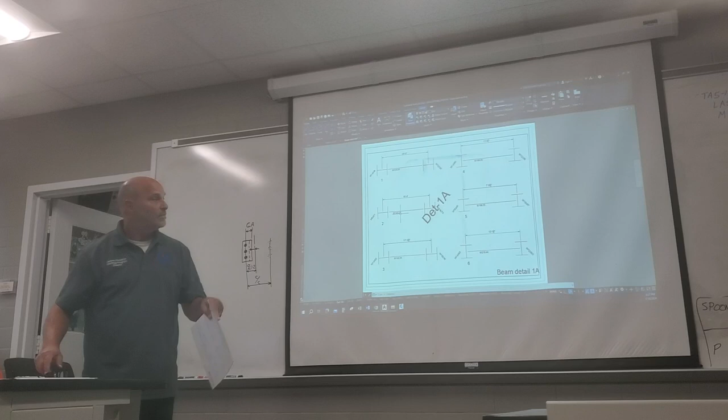Because I've shown you both ends of that beam. So on the previous assignment, we were just focused in on one end. All we could see and were worried about was that one beam and that one column right there. Now I'm showing you both ends.

So this is what would be handed out as a drafter. This is what we would receive. It's already gone from the design stage, where the facility says this is what we want. We want this kind of a unit. So different companies came in, they started engineering all the piping, all the other vessels and everything that needed to be out there and on there. And they said, all right, civil structural people, we want all this off the ground. How can we make that work?

So then the civil structural designers went through and they said, well, we've got this span right here. We need to support this. We'll put a column there. We'll put a pipe rack. We've got all this pipe that's coming from this location all the way over to here. We need to run all that pipe over there. Let's do a pipe rack because it's not just right there. Sometimes it's let's do a T-support, kind of like what we see outside these doors.

Does anybody take Highway 69 to Nederland, like by the airport? That facility that's going up in between Twin City Highway and 69, they're still in the civil structural phase of that. Most of the areas are. When you ride by there and you see all those square pillars, those aren't 4x4s. A lot of those, I'd say they're probably 16, 18-inch squares at a minimum. Those are the pilings they're pushing down into there to get that compression, get that strength up under whatever's going to be out there. Sometimes it's vessels, but it's the civil structural that does that.

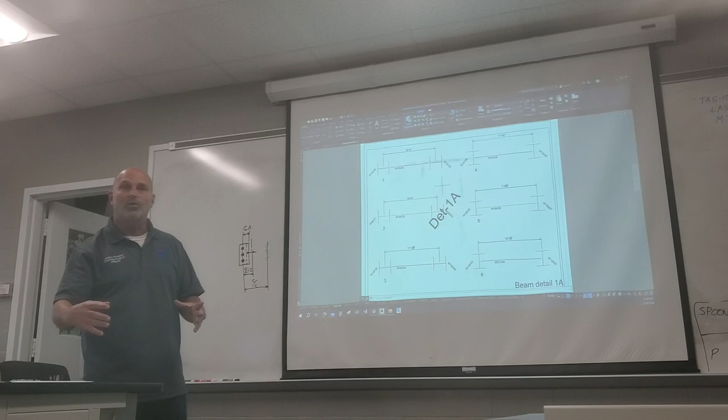So right now, they're mainly focusing on the below ground stuff. I don't go by there that much. Every few weeks or so, I'll ride by there and notice a few changes. But I was going by there fairly frequently during the long semester, and I was noticing pretty regularly they were out there pushing those pilings down. I've seen them do stuff like that out there at DD6. But that's all still civil structural.

Remember, civil structural starts at the top of the concrete and goes down. Anything steel above that concrete is still civil structural. All the rebar, all the footings underneath, that's all civil structural. All the beams, columns that you're going to see start going up pretty soon. Once they start getting all those things built, whatever's going to be sitting on those areas with all those little squares, it'll look like somebody took a handful of square toothpicks and threw them in the ground. Those are going to have something up there. They're supporting something. At some point, they're going to start pouring slabs out there.

As they pour slabs, you're going to start seeing something similar to those footings, similar to what you see out in parking lots with light poles, those concrete piers that stick up. If you're riding by and you see some of those sticking up close enough to the highway, don't get in a wreck. Go take the feeder and stop over there. Don't pick up any hitchhikers in that area, remember?

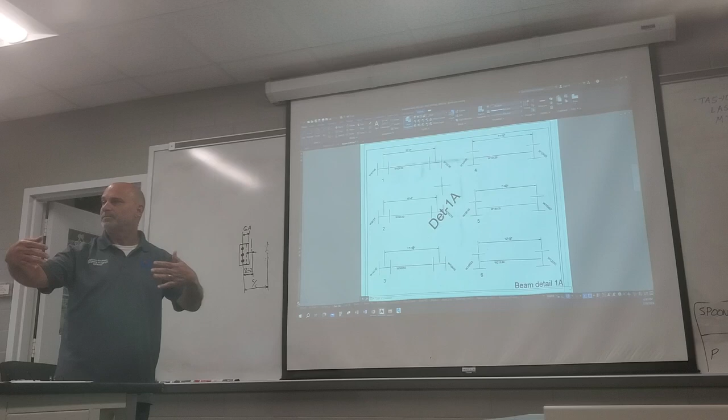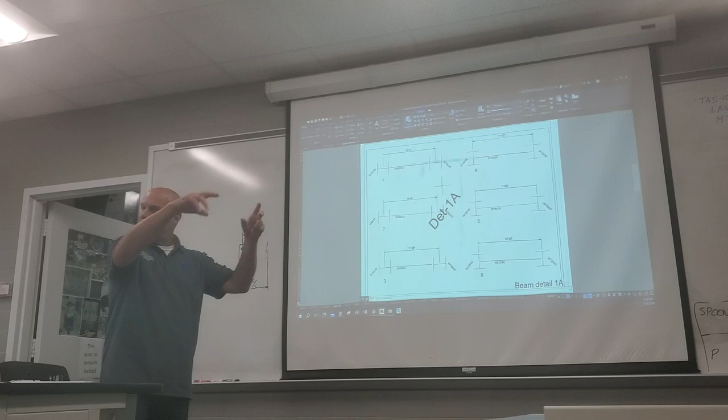You're going to see anchor bolts sticking up out of a bunch of those. In the future, you might see a bunch of those little piers sticking up out of the ground with the anchor bolts sticking up, usually 4. And then the next thing you're going to see is all these columns set on there. Then you see the beams starting to hang between them, the bracing starting to go between them. That's all the structural part once it gets up into that. So that's what it is.

Remember, this has to be 100% accurate before it gets out there. Not that place over there. They can probably drop it down on the ground and make changes because there's nothing going on out there yet. There's no actual facility, no unit, no processing being done out there, so there's no flammable gases. I imagine they have the freedom of doing stuff like that. But on your normal basis as a structural drafter, you're working off this erection drawing saying that we're going to build this. I need to tell them what they need to do to build that.

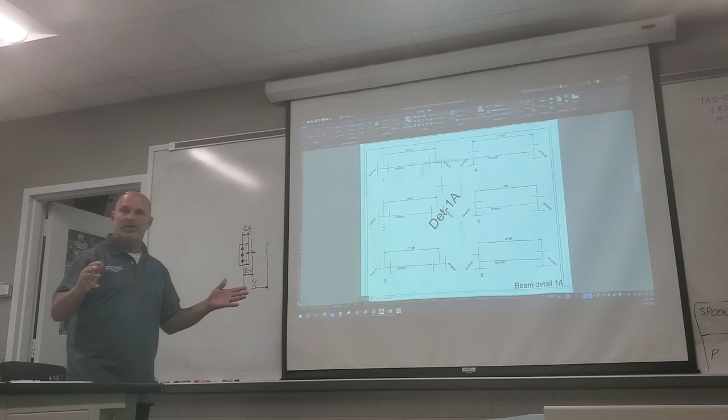We need a column this size, this tall, with holes at this location. An anchor bolt to the bottom with these holes, anchor plate at the bottom, base plate at the bottom, with holes in this pattern to match what's going to be out there when we pour the concrete. And then we're going to have this beam up here that needs to be this long with angles on each end, held back 1/4 of an inch, and it's going to drop down in there, and those holes are going to match. And they're going to move on to the next one, into the next one, into the next one.

So we as a drafter look at it and say, well, what's happening? On this one right here, as we talked about before, we've got a center of column to center of column dimension, 20-foot 0. We say, well, let's focus on this end, just like we did on that last assignment. We say on this end, we've got a beam that's attaching to the column flange. Our beam is a W12 by 26. Our column is a W14 by 48.

But what else can we pull from that picture? Well, we know that this end is going to have about -7 inches. We know that our angle gauges in here, our center to center is going to be either 3.5 or 5.5. We know that possibly by now, after doing that first assignment, you've seen that the W12s are on the 3 rows. So you're going to start to learn stuff like that. I can tell you how to judge it, but right now, look it up on the chart.

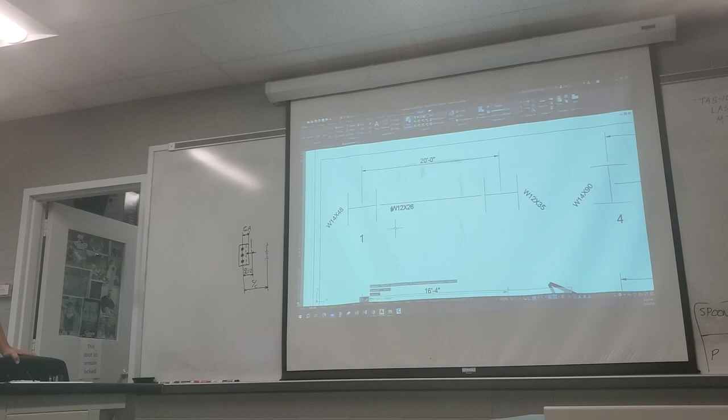On this other end over here, we're attaching to a flange over here. So our minus dimension on this end, our column is a W12, is going to be about -6 inches. So this as a drafter would be what we would be working off of to detail that member right there. To take that piece right there and say, here's how long it needs to be. Put the angles on this end. Here's how many rows. So that is what you're going to be doing on this one, is filling in that last sheet. I need to go get some copies of that too.

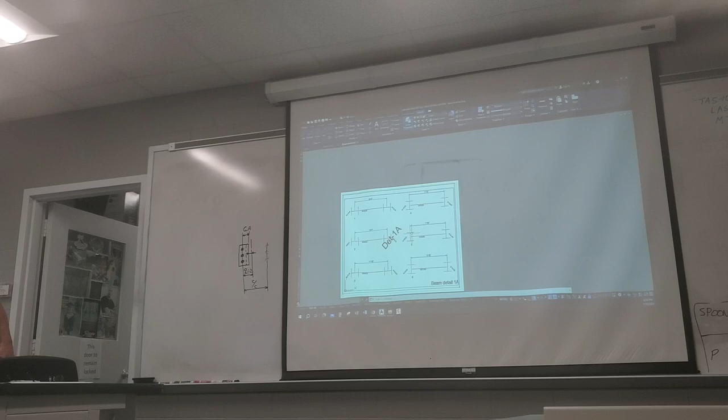So on your first sheet, on the left-hand side, you've got 3 beams attaching the column flanges on each end. On the right-hand side, numbers 4 through 6, you've got 3 beam details that you're doing. Those are attaching to column webs on each end. So on these first 3, about -7 for this one, -6 for this one, -4 over here, -7 over there, -7, -8. We can guesstimate on that.

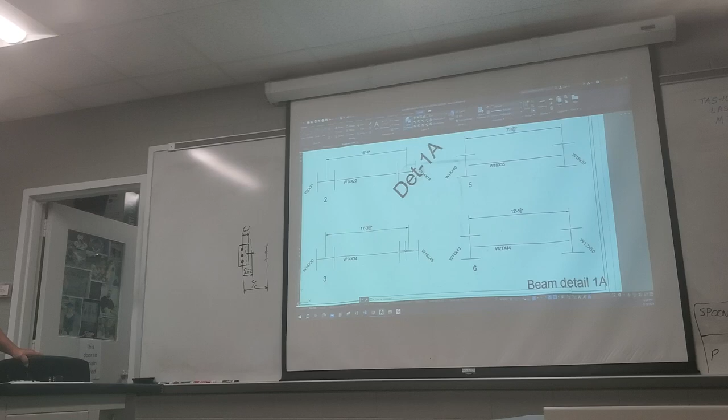And right now, like I said, it's a matter of just you looking at it saying, before I even let somebody else check it, I want to make sure that I'm at least kind of going, or maybe you're just jetting out of here and not even thinking about it till Saturday. All right, here's a quick check for it. If I look back at this piece right here, number 3, and on this end over here, I see -1/4 inch, 1/8 of an inch, 3/16 of an inch. I know something's wrong because that was attaching to the flange. It's going to be about -7. About -8 on that right end.

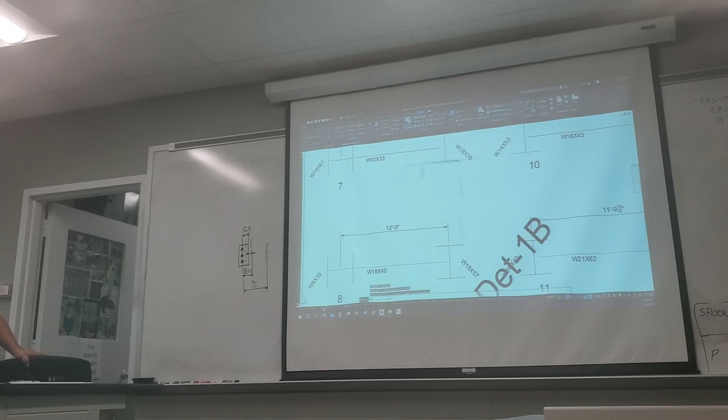Over here on these, we know that our minus dimension for all of these is going to be in the 1/8 to 3/16, 5/16 possible. I don't think we'll get that heavy though. But it's going to be right around 1/8 to 3/16 as a norm. The second page that I gave you, beam detail 1B. On this one, end to end, you've got a column flange on one end, a column web on the other end.

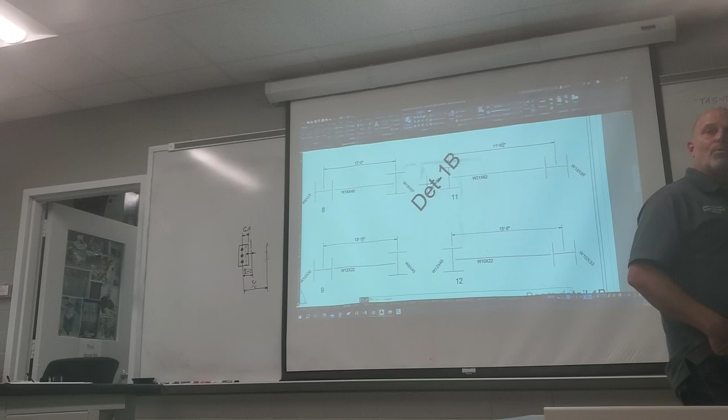Once again, when we're calculating those ends though, we're calculating just based on that end. Then we will look at the other one. What happens on that left end over there has nothing to do with what happens on this right hand end. We're going to calculate those 5 items just like we did on that first assignment for one end, and we're going to push that out of our head. You'll learn to carry some stuff forward. But for right now, you calculate one end, you push it out.

Then you look at the other end and say, okay, I've got a beam that is this size attaching to a column of this size. A column web or a column flange. You've only got 2 choices there. So on this one, it's opposite on each end. So on one end, it's going to be minus about half of what that size is. This one's going to be about -9 because we're attaching to the flange of the W18. This one's going to be about -5 because we're attaching to the flange of the W10. This end over here, all we know is it's going to be about in the 1/8 to whatever range.

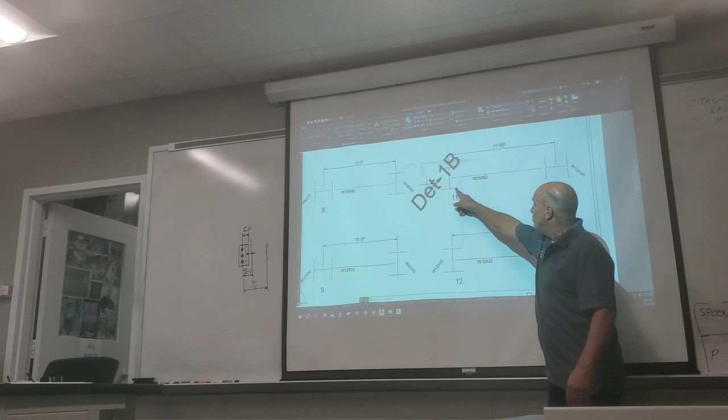Over here, 1/8 to whatever range. Over here, 1/8 to whatever, 1/8 to whatever. Over here, about -5, about -4. So what you're doing is, and like I said, I'm gonna go get some more copies of that third sheet here in a minute. I forgot I need to print some more of those out.

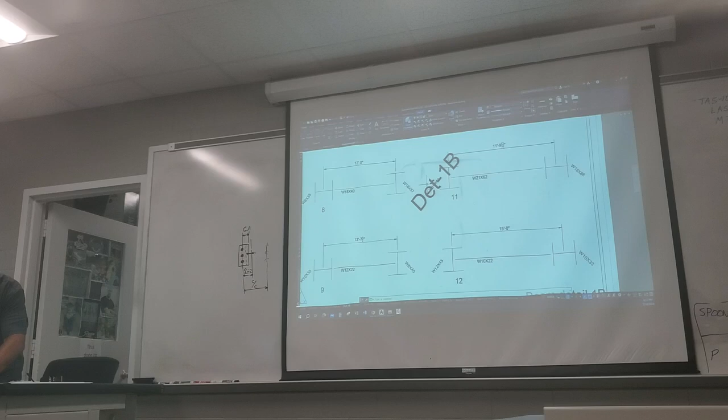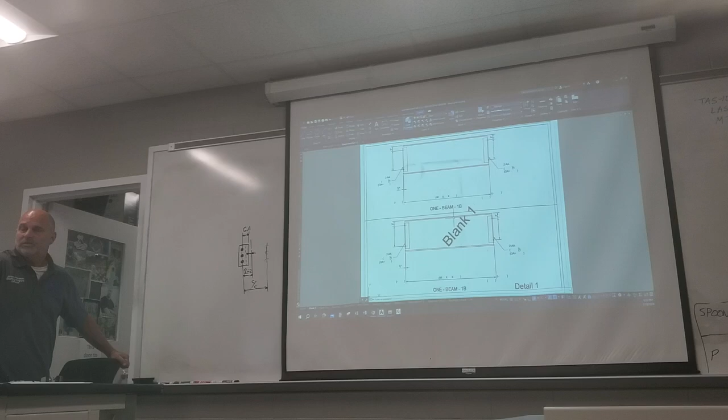So what you've got here is a total of 12 pictures between those first 2 handout pages. So you're gonna need 6 of these sheets as a minimum. So all I have in your packet right there is gonna be the one. So I will go get some more of these in a minute. But once again, you're gonna be filling out each end, just like you did before. The number of rows. The only thing that you don't have is a measurement on this one. I just wanna make sure y'all remember where that came from.

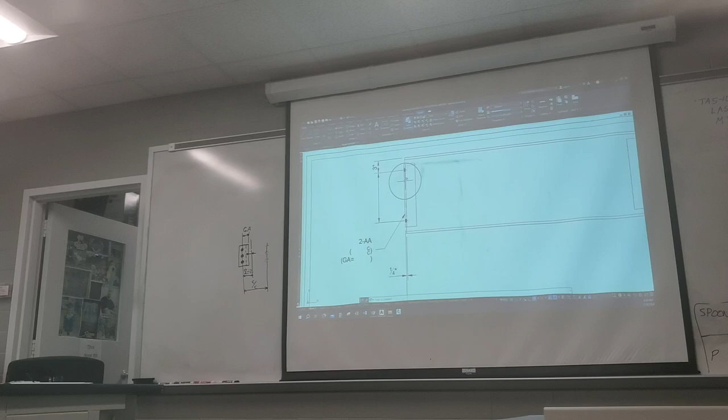So you've got your distance between rows. So if your beam has 2 rows, you're just gonna write 3 inches right there. If your beam has 3 rows, you're gonna say, well, there's 1, there's 2, let me draw a line, 3 inches right here for that measurement, 3 inches for that measurement. If yours has 5 rows, there's 1, there's 2, so you're gonna draw a line for number 3, line for number 4, line for number 5, you're gonna draw those lines out and get 3 inches between each one.

Mr. P, this one's a W6 and it's 6 1/8 deep, and this one's a W18 by 145, and it's really 18.5 inches deep, but the pictures are the same. It's a sketch. This is something that if you got a structural job, you can actually make you something like this or a picture like this that you can print out and just write your stuff on just to get you started on what you're doing. It doesn't matter how tall that piece is and how many rows you can physically put in between those 2 little lines that I drew. That number is coming off that chart.

So here's what's new. The new part, now that you're looking at it on its own page, its own detail. Right over here, don't worry about that 2-AA. We'll get to that later on. We're not adding that much new today. Just ignore that where it says that. Here's your center to center. Here's your gauge. You're gonna be filling those out. Your number of rows and your minus dimension, just like before. You're gonna be doing it on each end. The only difference on each end is that measurement right there. Then, this measurement right here. This parentheses on the bottom.

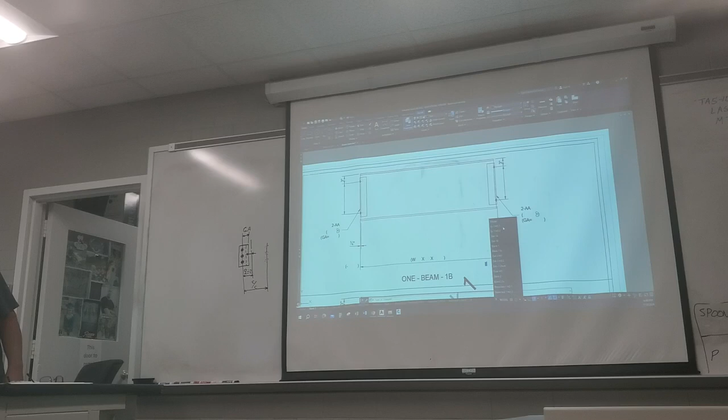If you look back at your sheet, the first sheet of this packet, like I said, I'm gonna print quite a few of those, so if y'all need extras, if you wanna use the one I gave you to make up some, use it as a note sheet, you're more than welcome to. I'll print more if I need to.

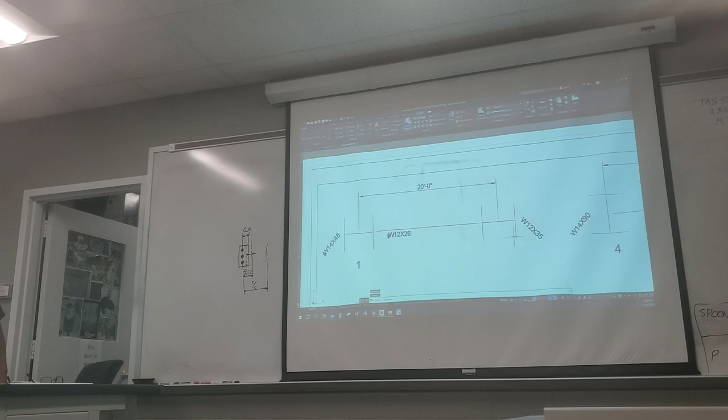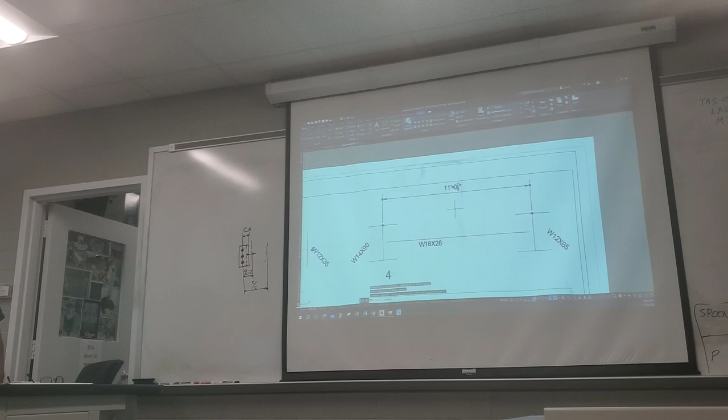So on number 1 right here, you've got a W12 by 26 beam attaching to a column flange on the left end of a W14 by 48, a column flange on the right hand end of a W12 by 35, and you've got a distance of 20 foot 0 center to center on the column. That is called your overall dimension. That's just what it's referred to. The measurement center to center of the column. It doesn't matter if your column is turned in that direction or if your column is turned in this direction, attaching to the web. It doesn't matter. Like I said, we always dimension to the centers of the columns.

So that 20 foot measurement right here on number 1. Here's your number for it right here. That 20 foot dimension is going to go in that area right there. That is your overall dimension. If the parentheses are too small, that's okay. Just write it underneath it or something. Don't stress over something like that. That is where your overall measurement goes. Your overall measurement being the center to center on your columns. Everybody got that?

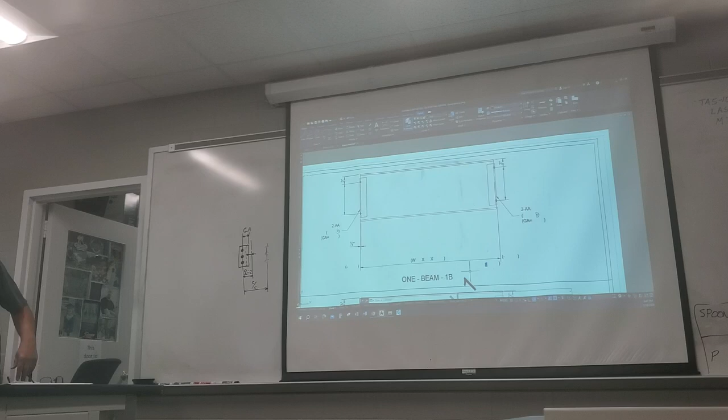On this dimension right here, you will see that that measurement from end to end represents that finished product when it leaves the fabrication shop, gets loaded onto a truck, driven out to some facility, some refinery, and brought in there, hooked onto with the crane and lifted up into position. So whether it's attaching to the flange or the web of that column, it doesn't matter. As long as we minus the right numbers, that thing should slide right down in between there.

So what we're gonna do is we're gonna take this measurement right here, our overall dimension. We're gonna subtract that number, and we're gonna subtract that number. Coincidence that that number has a minus in it? Subtraction in it, in the parentheses, called a minus dimension. So that's what we do. We take that overall, and we say this finished product that is gonna leave and just go perfectly into place. We subtracted on each end. There's how much we subtracted.

Could that number be a 0? Yes. Could that number be a plus? Yes, but we're not ready for that. We're tip of the iceberg. There's so many different variations in structural steel because we have to meet the needs of what's going up. There is no standard in the pipe department that says this is what we're gonna do. Just about every pipe spool that goes through those pipe departments is different.

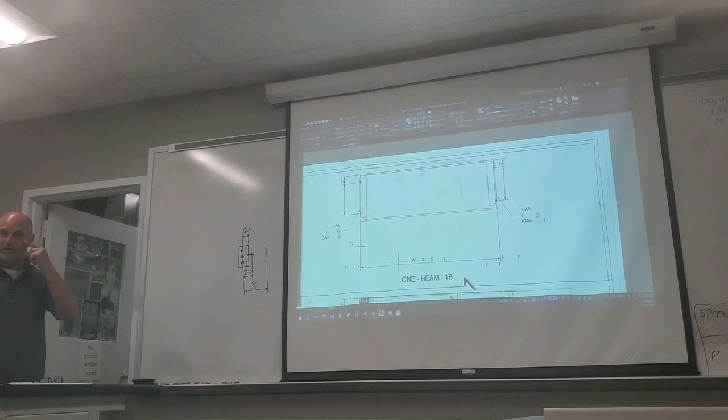I say, well, we're Exxon Mobil, why don't you build this facility for us? Sure, we'll build it for you. Another company says, hey, they got that nice new facility y'all built for them. Why don't you build it for us over here? Sure. Where you got room? What size area do you have for us? That's what's gonna dictate how everything is set up. So even though those two are built right across the road from each other, doing the exact same product, literally trucks pulling up and saying, which one of y'all needs a truck to? You know, who needs a truck? I'll turn left or right, it doesn't matter.

Doing the exact same product is gonna be a whole different layout because it's all based on where's the tank gonna be for this project, where's this vessel, this piece of equipment. Now we got a pipe between them. Now the structural people have to come back and say, okay, well, if this is what you're doing on this project, we need to support this run because it's 20 feet. Over on that last project, it went 6 feet this way and it turned 90 because it had to go this direction, not that way.

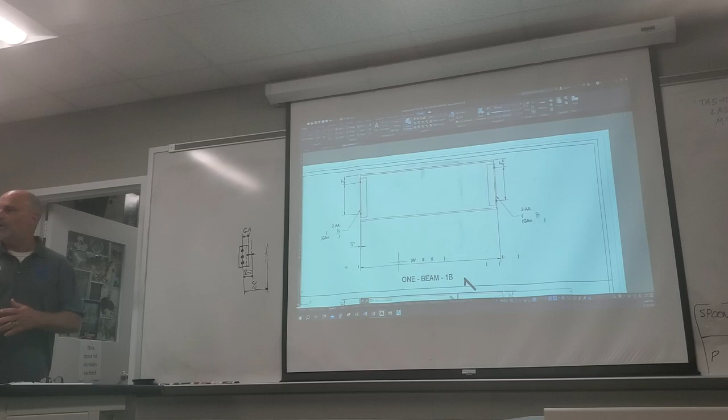So as a structural drafter, we have to look at each individual one. And then we have to look at each end of that one and say, what do I do here? What do I do here? And we're gonna write those minus dimensions down. Then we're gonna do the math equation. We're gonna say overall center dimension minus this equals, and we're gonna put that number right there where my cursor is, in front of those parentheses. That's referred to as a shipping length.

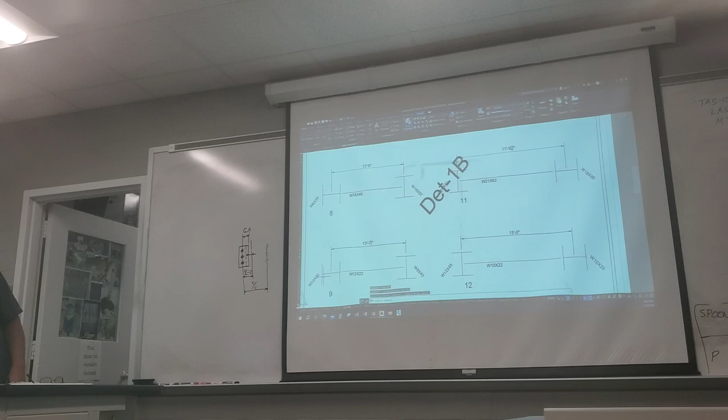So when we're putting all this stuff on a truck, we need to know how long of a trailer do we need. That's why it's kind of referred to, I think, as a shipping length. That's how big that unit is gonna be when it leaves to go to the next step, when it is fully fabricated. Inside the parentheses right here, W something. Remember, we're talking about the beam. So if I go back to that sheet, first sheet, our beam is a W12 by 26.

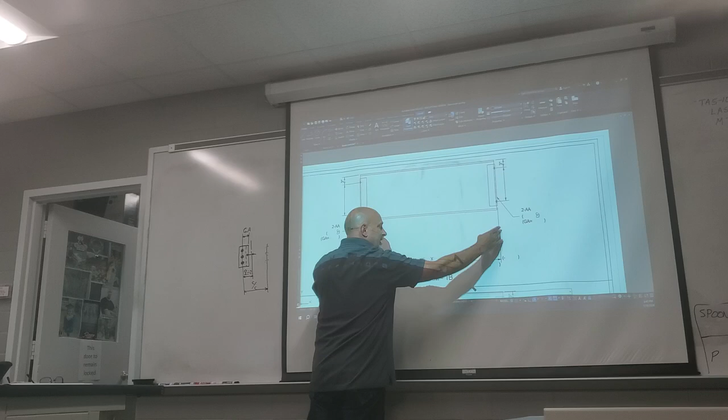So after we tell them the shipping length, the cut length, the end-to-end measurement for that piece once it leaves the fabrication shop, once we tell them this number right here, we're gonna tell them this piece is a W12 by 26 by, we have to tell them how long to cut that off. Because some point or another, those angles are probably gonna be made in normally just a whole different shop and warehouse type thing than what that W shape would be made in.

Those angles are gonna be made over here in your regular, pretty much standard around here fabrication shops. Most of them have one big area where they do nothing but those W shapes. The beams, the channels, stuff like that. They do the big heavy members. And then lots of times you have another facility, another shop over there that does nothing but plates. Maybe half of it does plates. Another half of it does angles.

So whenever that person goes to make this beam, he's gonna pull up this drawing that we as drafters, we as detailers create. And they're gonna say, all right, I'm making this one right here. Go get me a W12 by 26 and cut it this long. And then bring it down here. And if we had other things attaching to it, just like we saw out there, that handrail and stuff, maybe we've got plates on our beam. We're gonna detail this piece out. Right now, we're just talking about the ends of it.

So what dimension goes at the end? The shipping length or the actual? No, I'm gonna tell you. Okay. I'm gonna tell you in just a second how we find that. So we're gonna tell them, for the person over in this facility that's working on the W shapes, go get this size member and cut it this length. That length we know is gonna be held back 1/4 of an inch right here.

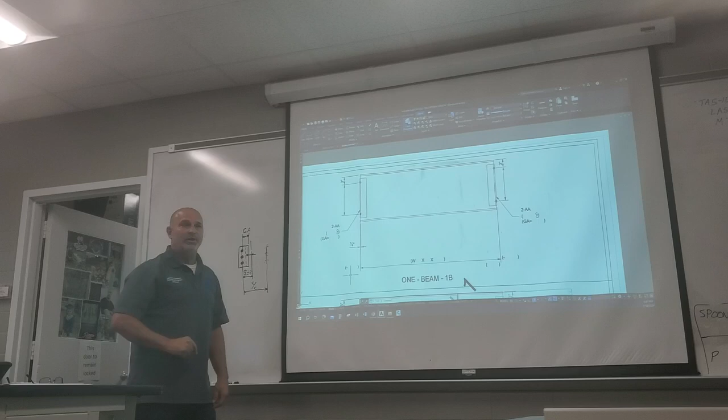So W12 by, so we started out, I'm gonna run through the formulas again. We had our overall minus our minus dimension, minus our minus dimension, gave us our shipping length right here, and then we're gonna tell them information about that W shape, W12 by 26 by. We've gotta tell them a length on that. So once I do this number right here, minus this, and I get this number right here, my shipping length, I can say, well, minus 1/4 on this end, minus 1/4 on this end, that's my length.

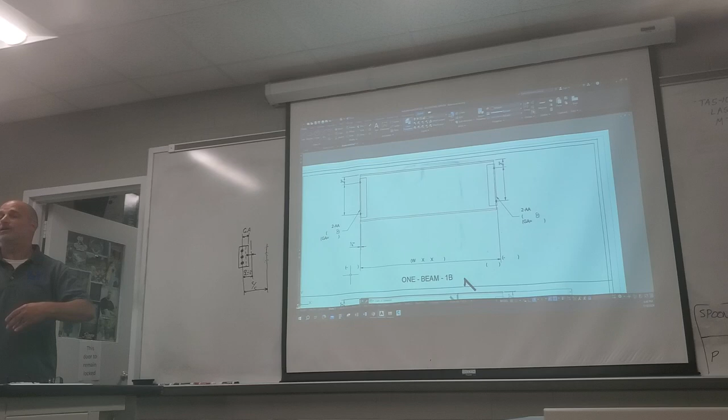So it's all formulas when you look at it. You don't have to be a math person, you don't have to like to do algebra or anything like that. But if you just write it down and say, oh, there's not a lot of A's and B's and X's and stuff like that, but that's a formula. Web thickness divided by 2, that's a formula. So don't be scared of the math. Don't be worried about the math in structural steel. It is what it is.

As drafters, at some point or another in all industries, it comes down to a measurement. Just because we do schematics in E&I, we say, here's a nice picture, at some point or another, somebody's gonna have to calculate that conduit, all that wire that's going through there, all the little fittings for that instrumentation stuff. So at some point, measurements are involved in all forms of drafting.

So we've got to tell that person how long to cut that member. And then once again, this is going to be done in one shop, those are probably going to be done in another shop. They're going to say, all right, on this end, we need 2 angles with this gauge, this center to center. On this end, we need 2 angles with this gauge, this center to center. And we need 1 beam this long.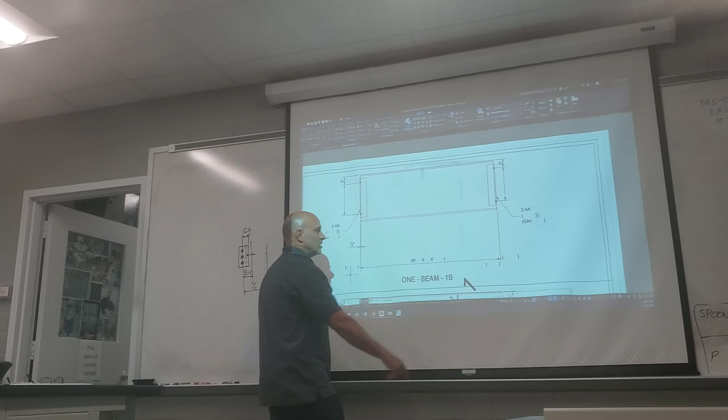Here's the twist. So this number minus our minus dimensions gave us our shipping length. That's the end to end of the angles and everything. Then we said that to make this, we already told them some info about the angles. For this, we need a W12 by 26 by our length. We don't show 1/16 of an inch measurements in this box right here. Everybody see that? That value right there, we do not show in 1/16 of an inch increments.

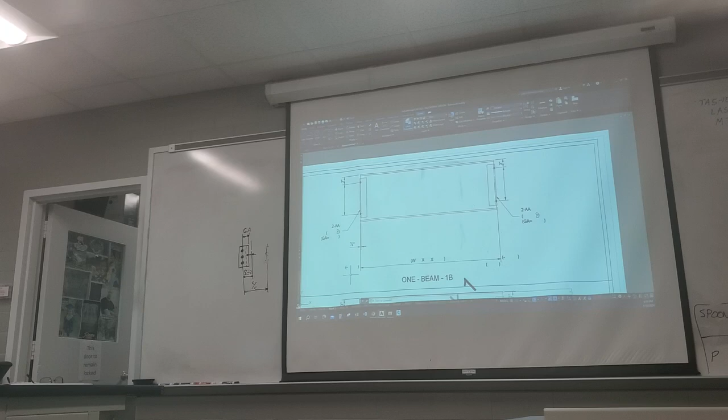How do we eliminate that? We don't show that dimension. That dimension could be 1/4 of an inch, it could be 5/16. It doesn't matter. When we go to write this length down here, we say that number minus those 2 numbers equals this, minus 1/4, minus 1/4. If it gives us an answer that's in 1/16 of an inch, we're just gonna drop a 1/16 off of it, because we're not gonna show that 5/16 anyway. It's just another rule. Lots of rules in drafting.

A lot of them can be answered just by looking at this stuff that I had up on the desk the other day. And Mr. P, why didn't you put it up on the desk? Well, I want y'all to understand that it's over there. If y'all want it, if y'all need it, go grab it. Bring it to your desk if you need to.

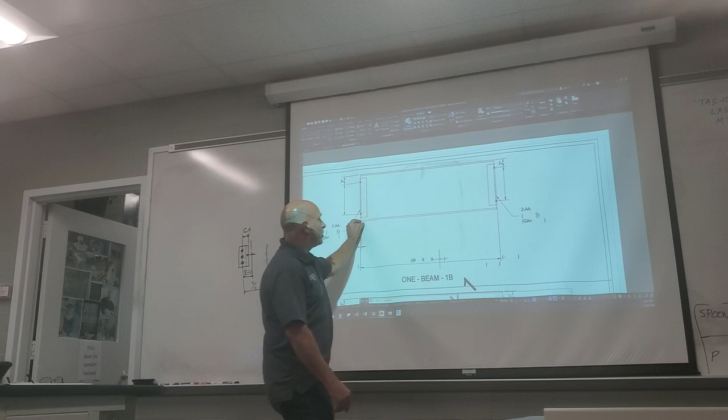So that one in the parentheses, you're subtracting a 1/4 inch from it? Which one? This one right here in the parentheses? Yes. We're subtracting really a 1/2 inch. A 1/4 here and a 1/4 here, yes. Every time? Yep. That's that extra cost of having to pay to have those 100% square cut. We're not gonna pay that. We're gonna do 10 beams for the cost of one, and we're gonna do it quicker than that machine's gonna square cut that one. Probably not quicker, but we're not spending the money on the machine.

So the shipping length minus a 1/2 inch. Yep. And then if it's in 16ths, knock another one off. Why? Not sure, just a rule. I don't know why. Knock the 16th off if it's in 16ths. So when I do the math, this one's okay being in 16ths, but when I subtract a 1/2 inch, so if I get a number right here, 10 foot 11 and 9/16, I'm not gonna tell them to cut that member minus 1/4, minus 1/4, 10 foot 11 and 1/16. I'm gonna tell them 10 foot 11. I'm gonna knock a 16th off. It's just a rule.

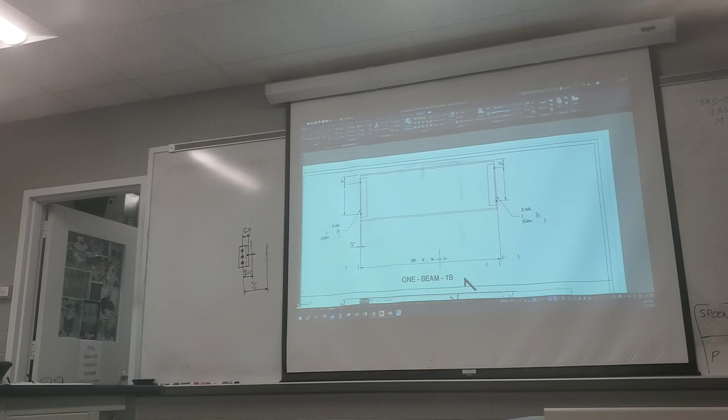So that's the only step that you're doing differently. You're carrying that value from that other sheet over to here, your overall dimension from end to end. And then you're doing the math, you're saying this minus those, and you're writing that value right here. And then you're looking at that other sheet saying what size is it? You're writing that right there.

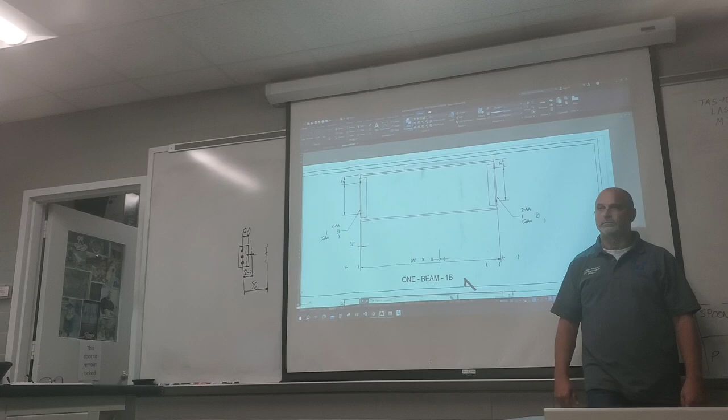So, I got a question, you kinda confused me there. So, say it was 11, or whatever you said, and 9/16. So you're knocking it back down to... I took the half off because of the quarter and quarter on each end, okay, which left me 11 foot something and 1/16. Oh, okay. I was thinking the other way around.

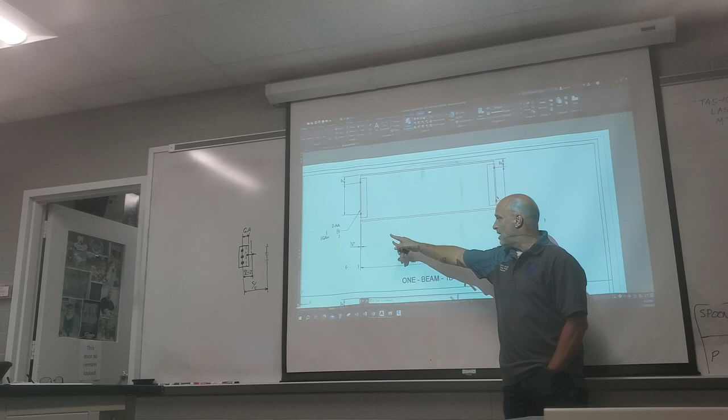From here to here, we're taking this number minus a quarter to get this value. And that is the only rule really for that: if it's in a 16th, knock another one off. If your answer right there is something in 13/16, you're gonna put something in 3/4. You'll knock a 16th off. Okay, yeah, that's what I was getting at.

Cause I thought you went from 9/16 all the way down because of that rule. No, I went because of the minus quarter. Okay. Yeah, no, it wasn't just automatically knocking it off to an even inch. Okay. Yeah.

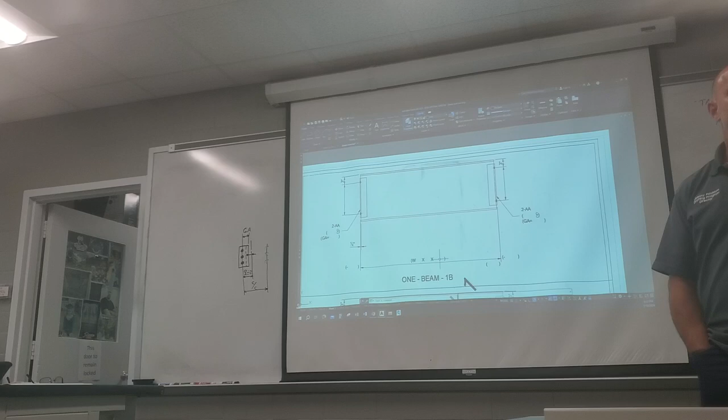So remember that, y'all catch that, you're knocking a 16th off. So if it's 1/16, 3/16, 13/16, 9/16, just knock 1/16 off. You get an answer of something in 7/16 right here, you're gonna write 3/8. You're gonna knock 1/16 off of this answer. Good question about that one. So for all of those dimensions, we're just going off of number 1? For this detail right here.

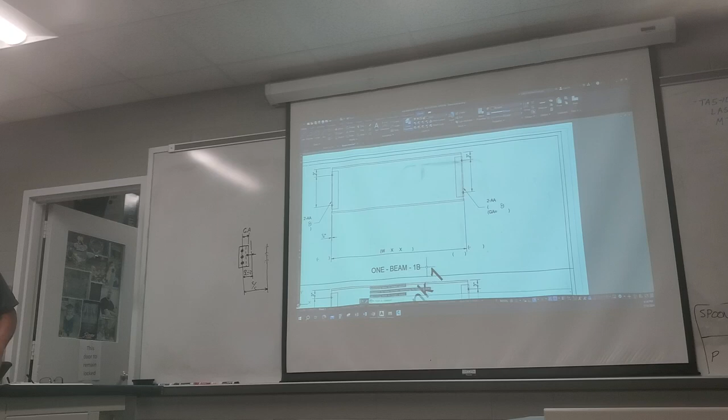Okay. So what I want y'all to do is tell me which one it is right here after the B. That's where you're gonna put what number it is, number 1, number 2, number 3, 4, 5, all the way up to number 12. And we do that for both of those? That'll be number 1, that will be number 2 on the bottom, then you have another sheet, number 3, number 4. Don't forget to put your names on your sheets, I'm gonna print some more.

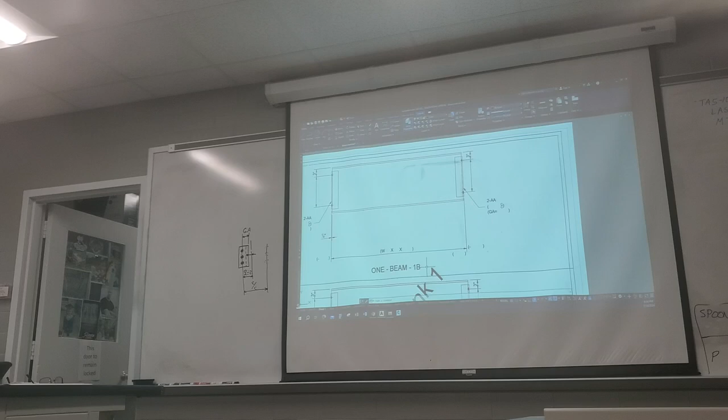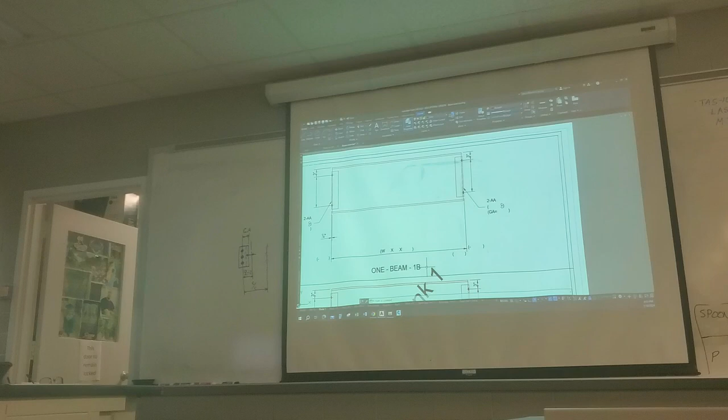So those of you that were taking notes and writing that down, that's what it takes, trust me. Unless you have a photographic memory to learn everything for structural steel, because there are so many, you hit this thing where you say, okay, that's a standard, yes. And then right after, it's like, nope. That's a standard, except. That's why the lights are weird. Now we can see what's going on. So a lot of these have an unless or except after it. So just when you think this is a rut, it's good, I'm chugging along, bam, there's another train track that cuts off. Which way's the switch go?

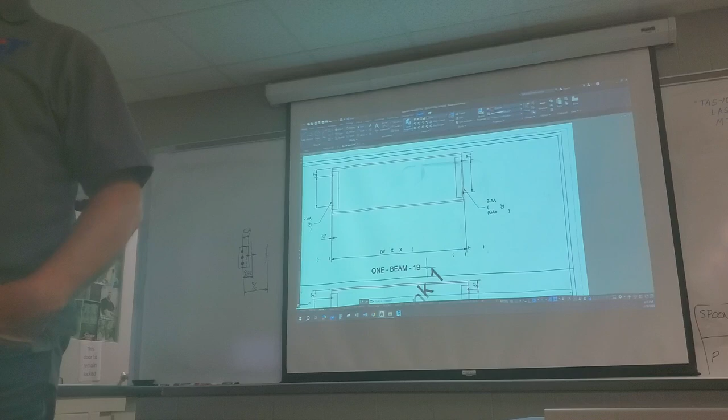So we aren't writing anything on the first 2 sheets? Correct. I don't need the first 2 sheets back. That's just where you pull your info from. So you're gonna write each one of those numbers. The numbers are 1 through 12 on those problems. That's where you'll write that, right here. So the only new difference is you're gonna pull that overall from those first 2 sheets and write it here. It goes there.

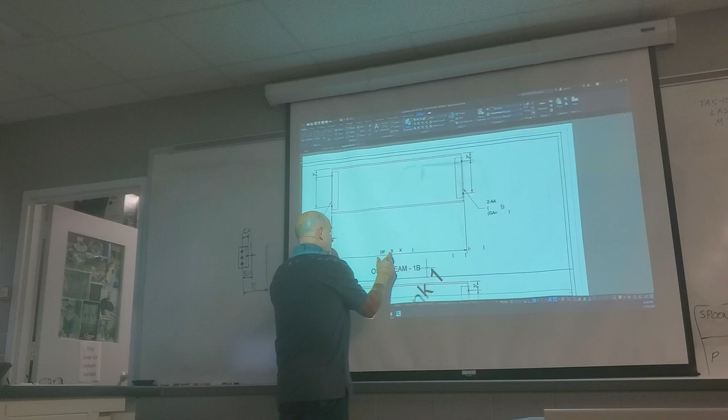So remember, if you just think of it as formulas, it's just like when you drive here, I go to this point, then I go here, then I go here. Same thing with this. You pull this number over, then you go here, minus this, and you put it there. Then you go minus this, and put it there. Except if it's in a 16th of an inch increment, knock one off.

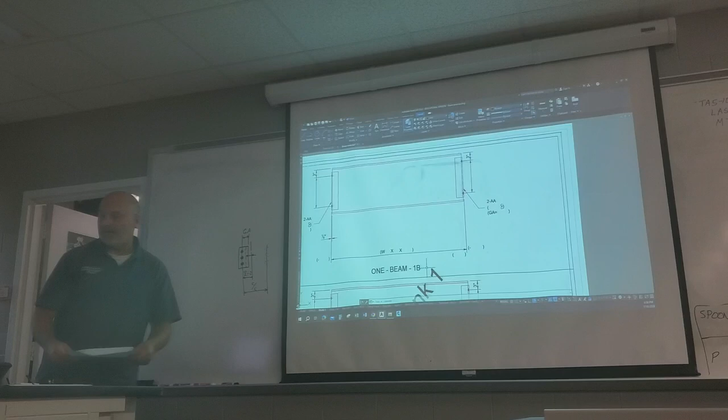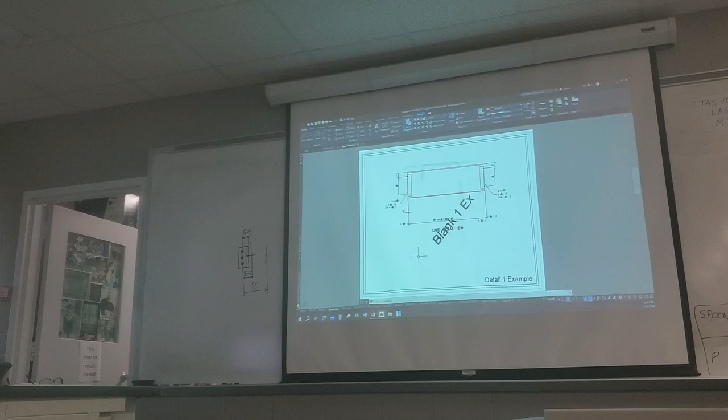All right, I'm gonna go get some more copies of that second page. And see on this, the 4th page that I gave you, I forgot about this one. This one right here shows you exactly where you will be filling information in. Each one of those asterisks represents something that you will fill in. Each one of those asterisks, you should have somewhere either in your brain or in your notes saying what goes there.

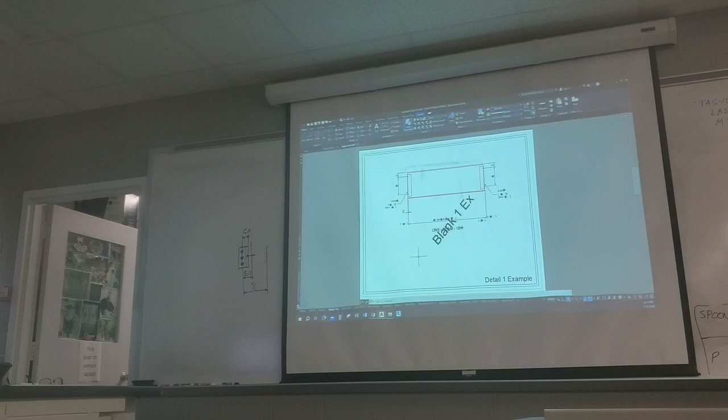Do you have any copies of the past homework assignment? Yes. Can I have one of those books? Yes, I've got some up there. When I get back over there, let's go grab those for copies. So any questions before I go get copies? Go ahead, Madam Brown.